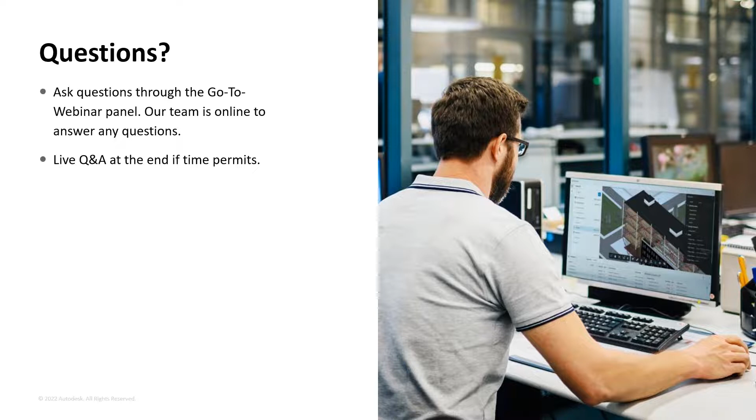During today's presentation, we'll cover what Autodesk Takeoff is, how to win more bids with faster, more accurate takeoff, and then we'll jump right into a product demo to see Autodesk Takeoff in action, so that way you can understand how we can really help you complete your takeoffs more efficiently.

Just for starters, to level set a little bit, it's obviously not a big secret that 2021 was a very challenging year for the construction industry, much like many other industries, dealing with major supply chain issues, increases in material costs, and also having to navigate the massive labor shortages. But despite all these challenges, contractors are really feeling optimistic about 2022. Based on recent survey results released by the Associated General Contractors of America, they are actually expecting to restart those delayed projects and tackle the supply chain issues and labor shortages throughout the year.

With the expected dollar value of projects across most building segments expected to increase, this can really lead to higher revenue growth for your companies as long as you're able to build an accurate project estimate early, especially given those rising material costs.

In the latest global construction survey by KPMG, contractors and owners reported technology as the second most important capability to help deal with some of these disruptive events that we've seen over the past year. 50% of the engineering and construction firms that responded plan on heavily investing in technology, with others reporting additional moderate investment. So why are so many engineering and construction firms planning to invest heavily in technology? Because it truly can help to alleviate the pains of skyrocketing material costs and labor shortages by helping to define costs more accurately early on and by helping teams work more efficiently together.

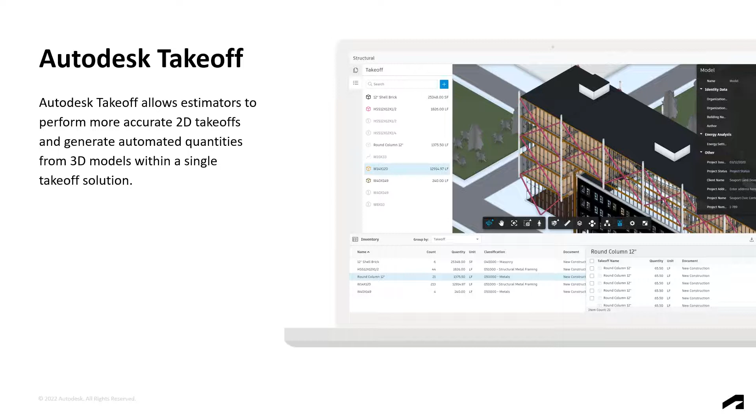Autodesk Takeoff is part of the Autodesk Construction Cloud and leverages Autodesk Docs for its document control, the same document management that's leveraged by Autodesk BIM Collaborate and Autodesk Build. This ensures a single source of truth for our project, staying connected from design to construction in a single environment.

And now let's see Autodesk Takeoff in action. I'm going to first run through project setup so that we can establish a company standard on projects going forward, setting us up for success.

So on the screen now is our project list. This allows us to access all of our projects from a single location, and we can also set up our project templates. Project templates allow you to configure template settings for Autodesk Takeoff, including takeoff packages, classifications, measurement systems, and definitions for takeoff types. In this example, I'm going to be using my Autodesk Office template.

I'm going to first navigate to the takeoff module here by selecting it in the dropdown. And now you can see in our template setup here, we have the ability to configure our takeoff packages and our files. You can think of these takeoff packages as ways to organize and contain all of your takeoff data related to one scope of work in your project. Think of this as like a scope of work or a bid package.

I'll go into my structural takeoff package here, and you can see my different definitions for my takeoff types. In this example, I have concrete, masonry, metals, and finishes. You can see my different tool types here that range from linear, area, count, or even BIM takeoff types. This is going to establish a standard for our team moving forward.

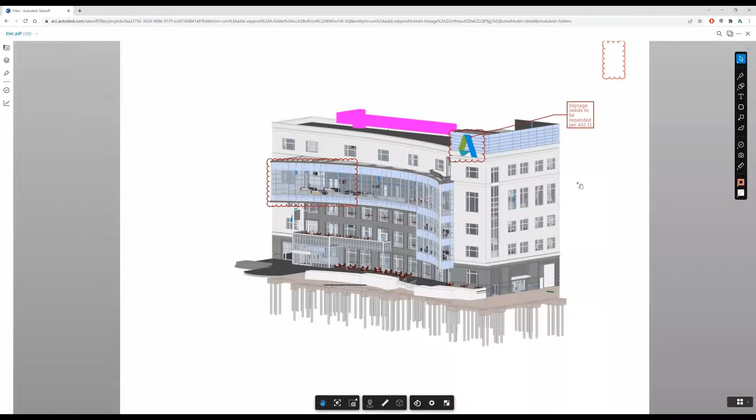I'm just going to open up this PDF to make sure it's the right one that I want to use. You can see there's some markups here that I've added. Again, this is all Docs functionality with our document control and document management.

Now I'm in the Packages tab here, so we can see all the scopes that are on this project. And in the settings here in the top right, this is where we've defined our classification system.

Classification systems make it easier to take the data from Takeoff and connect it to estimating and use it with our external systems. In this case, as a general contractor, I have my CSI codes here broken out by level, and you can see the code description and unit of measurement for that classification code.

We also have the ability to have a secondary classification system so that we can apply two classifications to the same takeoff. In this case, it's a Uniformat structure. And then also we can set up our measurement system, whether that's an imperial or a metric project.

This is the template in case you want to upload your own classification codes. All you need to do is follow the instructions at the top, and it really just needs a code, description, and a level so that you can upload your own custom classification codes.

All right, so I think I'm going to pass it back to Rachel, and she'll dive deeper into the Autodesk Takeoff product. Awesome, thanks Austin.

So yeah, now we're going to dive a little bit deeper and kind of walk through what that 2D and 3D takeoff workflow really looks like within the tool.

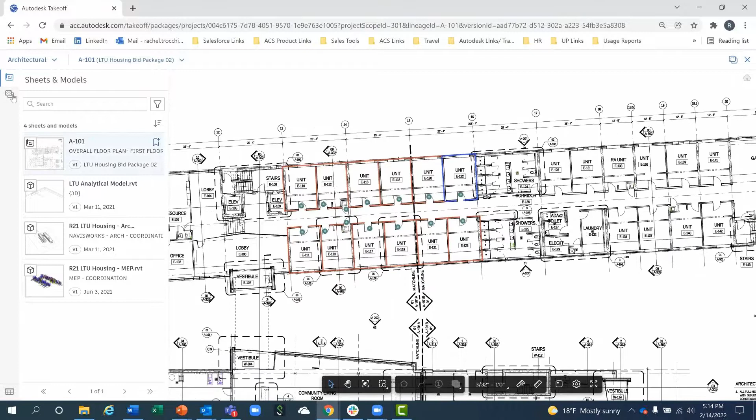So you can see I already have some walls and doors taken off on here, but if I want to go through and continue to add additional takeoffs in here, I can go ahead and leverage any existing takeoff types or create a new one, which we'll walk through.

We also can leverage that standardization with importing over different takeoff types. So I can import takeoff types from any of those templates that we have, or I can also import takeoff types from another project.

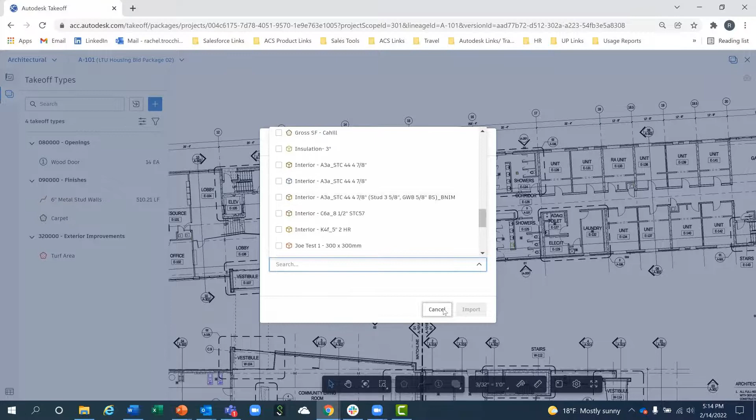So once we jump in here and we want to create a new takeoff type, all we have to do is just hit that little blue plus sign.

So let's say I'm going to walk through a tile takeoff. So let's just say it's a 6-inch by 6-inch tile. So we title that. We can then go ahead and select our tool type. So this is going to be a flooring tile that I'm going to be taking off, so we'll select that area tool type.

We can define any colorization that we want to be applying to the plans. And then we start to define our outputs.

So for my tile takeoff for the flooring, I want to be able to classify this so we can organize it based on that CSI code to make it a little bit easier when we go to push this quantity information over into our estimate.

And then we'll define that unit of measure. So first off, I always want to pull my square footage here for my flooring, so we'll go ahead and we'll select that area.

But if we also wanted to know the count of tiles that needed to be ordered here for this section of flooring, we can also go ahead and add an additional output for our tile count. So you can see in here, I'm selecting a unit of measure as count, and I'm going to embed a formula in here, so I want to divide my area based on the area of each tile that's going to be on that floor.

So as you go about just kind of typing in that formula there, now when I go through that takeoff, we seamlessly will be able to get the total floor area as well as the total count of all of our tiles.

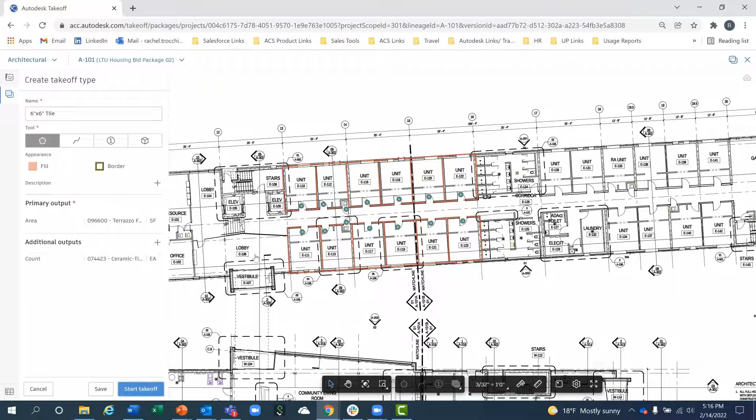So if I hit start takeoff and I start to zoom in, you can see that we snap to our different points here, snapping to the corners. And if I just double click, that completes that floor takeoff.

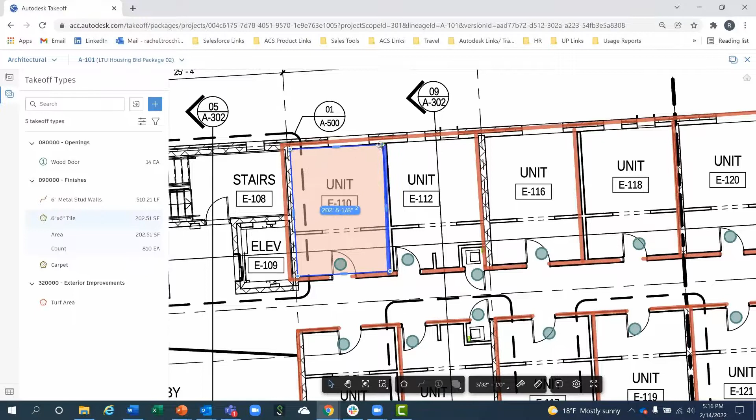Over on the left, you'll be able to see those quantities counting up as you're taking off this flooring tile. If I just hit my space bar, I can come through and adjust these different takeoffs, add curved lines if I wanted to, add additional vertices, or anything like that as needed.

We also can go through and create some more automation and duplication in here. If I come through and do a drag to select and select all these different units, this happens to be a college housing building, so it has a lot of different dorm units in it. We don't want to take off every single unit, so we can mirror any of these units, rotate them 90 degrees, or just do a quick copy and paste.

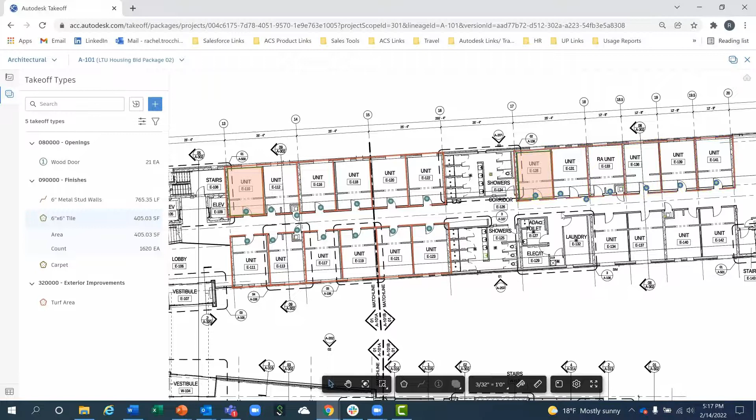Just by using Control C and Control V on my keyboard, I copied those takeoffs and added them to the rest of the units down the hallway. It makes it super easy to continue that. Obviously, you can then make any adjustments as needed if it's not perfect alignment down the hall.

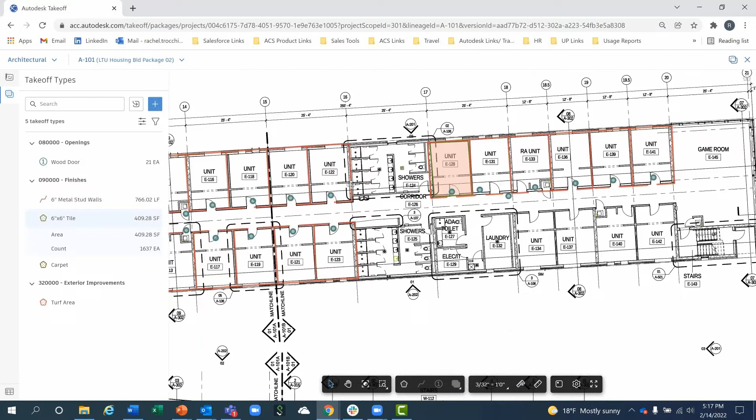So that is the 2D process of things and how to gather all of those different quantities. From here, we could select any other takeoff type and continue that 2D takeoff as needed. We also can jump in and start to gain even more automation from the 3D model.

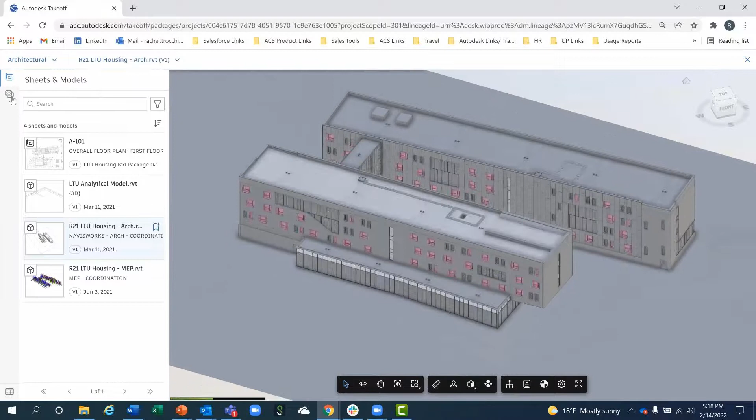As I jump in here, I can start to select different things within the model. This will help you understand the project a little bit better and create more automation and efficiency in your takeoff process. So what you're seeing within this model is that all those pink windows have already been taken off. There are some additional window types that haven't been taken off yet.

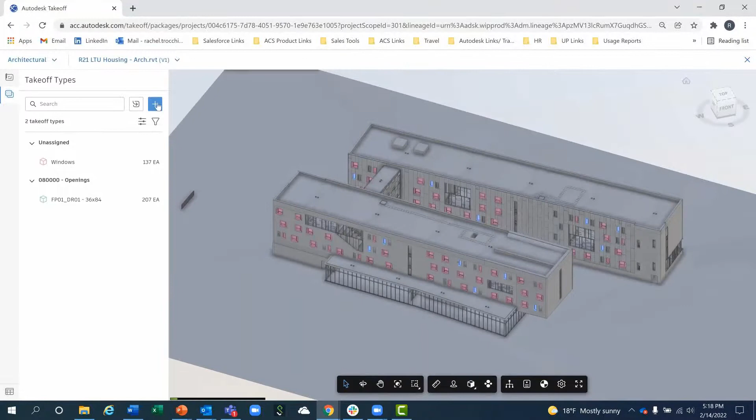If I wanted to select all those 02 windows, I just do a right click and select all windows of that type, and then I can generate a new takeoff type. So we'll say these are my 02 windows. We're going to gather that BIM tool type, and then define that output again.

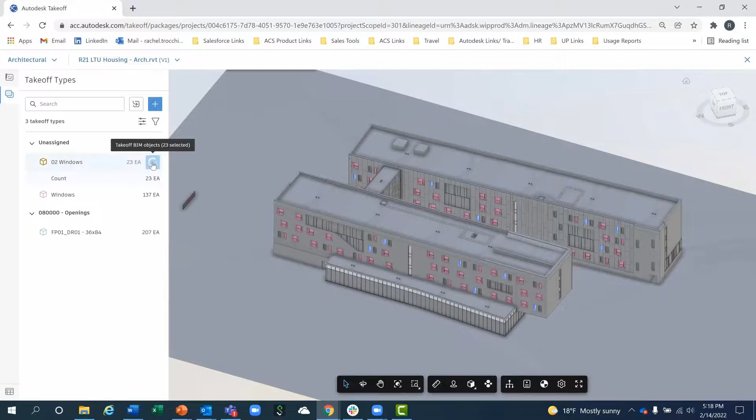Again, you can continue to gather multiple outputs here. For windows, I just need my count, but if you wanted your area of windows, you could also pull that from the model. As I start that takeoff right away, because I've selected all of them and hit that check mark, I've now taken off all 23 windows. It really creates a much more efficient process than just tracking and tracing over those 2D plans.

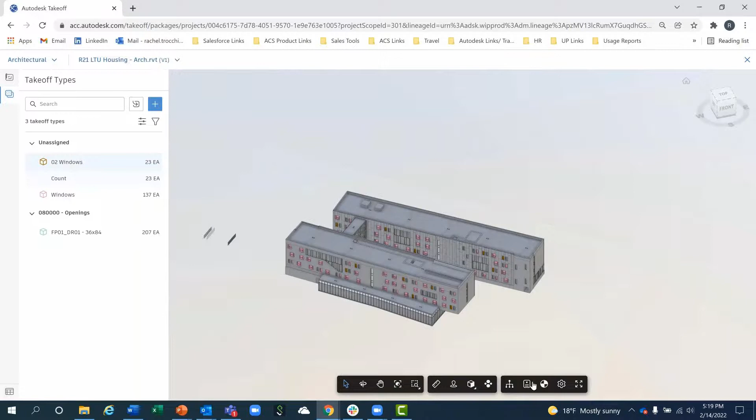As I select on the flooring here, I can go ahead and hide different things within the model. You can also use this model browser to understand the model a little bit better, as well as filter down into my different levels. If I click on just my 4th floor, I can easily dive in and understand if I missed anything on the interior side of the model.

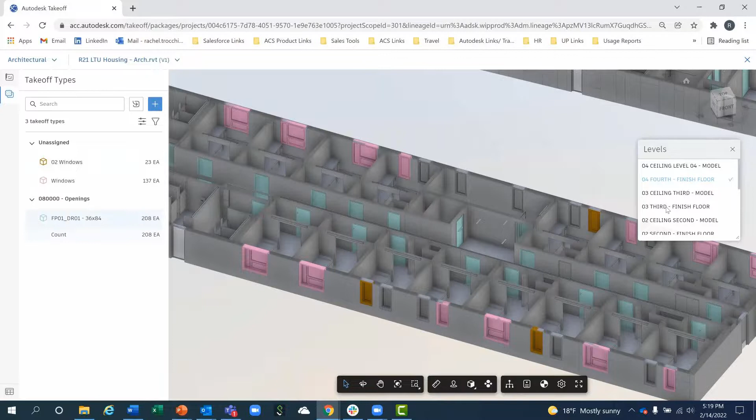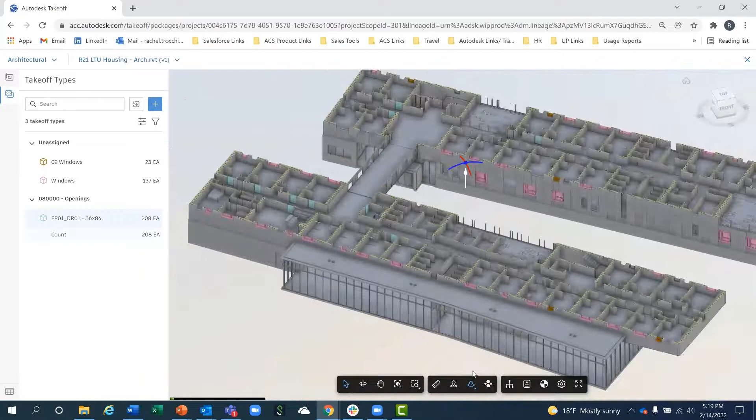I can click on a door and go ahead and take that off again. Now that's colorized and taken off with those other doors, those 36 by 84 doors. You can also continue to investigate the model a bit more by utilizing our sectioning. Using that sectioning plane, you can see I'm sectioning from that vertical aspect, but you can also add in other planes to continue to section down that model.

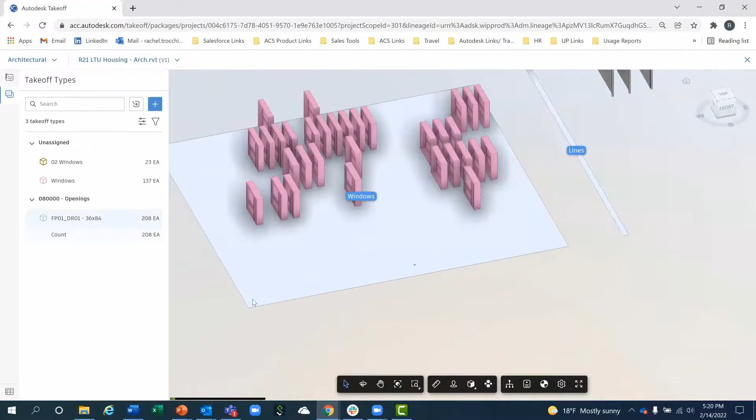And then lastly, we have our form clusters command, which really breaks down the model into kind of an estimator's point of view. So you can understand, okay, these are all my windows on the project. Have I missed any of these windows from the model? I can select on any of those, take them off directly from here, or I can hit that form clusters command again and have it bring me right back into that model, showing exactly where that window should be located.

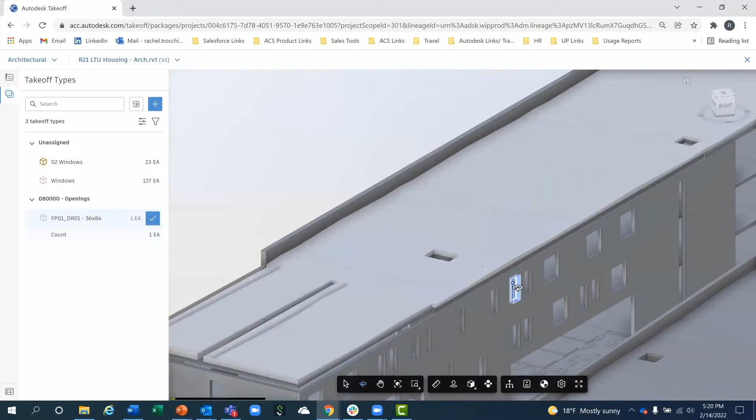Again, it continues to give you a better understanding of that project by being able to leverage that 3D model a little bit better. I did hear from one customer more recently, and they were taking off a project where they were able to understand that the entire railing he had taken off in the 2D side of things was actually a totally different material type. It was hard to identify that without looking at the model. So as you can see here, just below the model, we have our inventory.

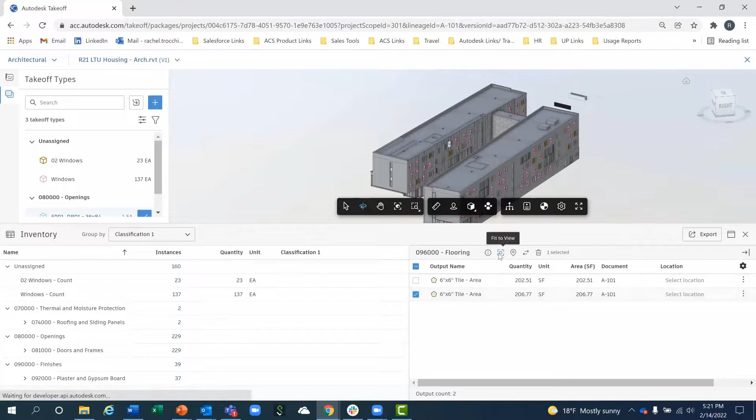So from this inventory, this can be organized based off of that classification group, or organized based on your different takeoff types. And then we can also select different items and investigate where they were actually taken off in the project, whether it's from the 2D side of things or the 3D side of things.

We also have the ability now to assign out different locations to our takeoff items. So if I wanted to select everything on this floor plan, I could select and assign a location, then select a location from our dropdown. Once we do that, we can organize our quantities directly in the inventory based off of that location.

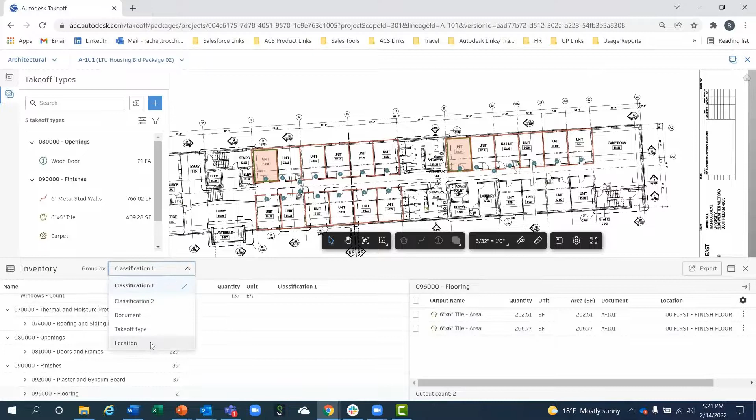So I could break things down and have a full breakdown of all my quantities on each floor of the project, or maybe break it into different zones. You can organize it on however granular a level that you want. And because Autodesk Takeoff is part of the Construction Cloud platform, all of these locations will follow suit further down through that project lifecycle.

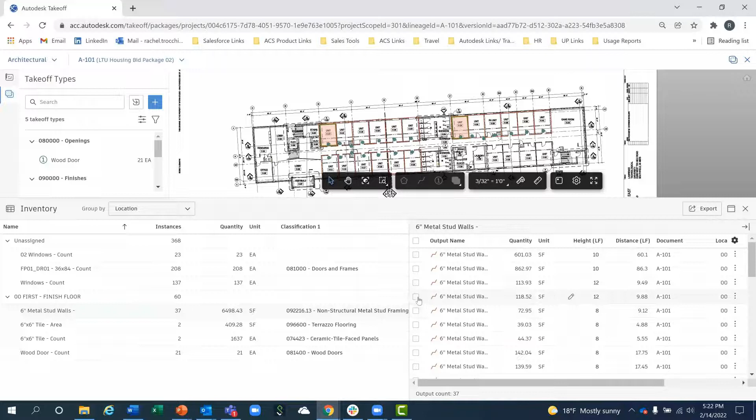Another point I want to make is you can make inline adjustments directly for our different quantities. So let's say some of these 6-inch metal stud walls are now a little taller than originally estimated. I can select them, make those adjustments, and because of the formula we've derived, our square footage for all those walls is now being adjusted. It's really easy to make any quick adjustments on the fly as you're working through.

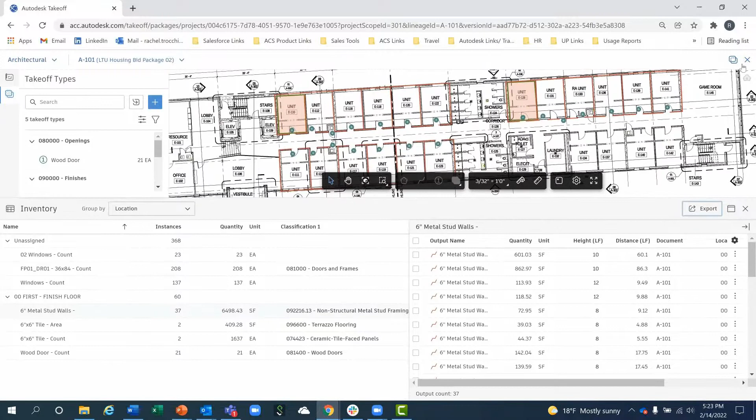Once that final estimate's complete, we can export this information out directly into Excel to push over into that finalized estimate. So we gather all these quantities from the 2D and 3D side of things, and then populate all that directly into Excel to finalize that estimate or push into an estimating database.

Back here on our packages tab, we also have the ability to save a project snapshot. These project snapshots are huge because you can essentially save a time and place where all your quantities were at. So I'm saving, as an example, a 50% DD takeoff snapshot here, and now all of these quantities will always be referenceable throughout that project.

So you guys can understand how those quantities are developing and changing based on different design changes throughout the full project. And within your work in progress tab, you can jump into any new updated drawings, pull over those previous takeoffs forward into the next design iteration, and continue that takeoff process and make those adjustments there. Of course, you can add as many different snapshots as you want to continue to track that full estimate throughout the project lifecycle.

So that was a quick walkthrough here of Autodesk Takeoff. There's definitely a lot more capabilities that we didn't highlight, but I think really highlighting the 2D and 3D collaboration side of things is really important, so that way you can really be able to take off any job.

Some jobs don't always have a 3D model, so leveraging that 2D information can be really important and crucial. And when you do have that 3D model, you're not going to leverage it for 100% of your estimate. You're going to gather some of those larger quantities, like your windows and doors, to substantiate that estimate and fill it out fully, and also gain some efficiency and accuracy along the way.